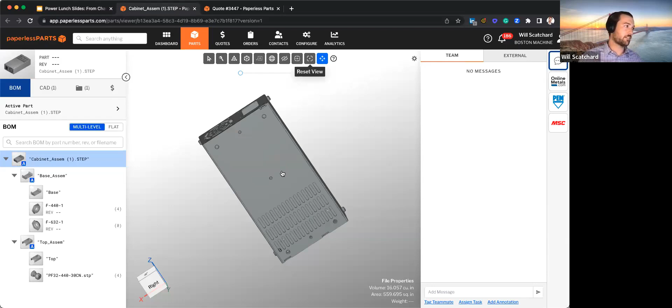So when we talk about viewing the BOM, this is an area where we've spent a lot of time to make sure we have a solution that supports what our customers need. This is the ability to view the different files you receive from your customers. You can do an explode view here on the top of the screen and see all these different components separated out from one another, and see the size of the part file we're dealing with for that entire project or assembly.

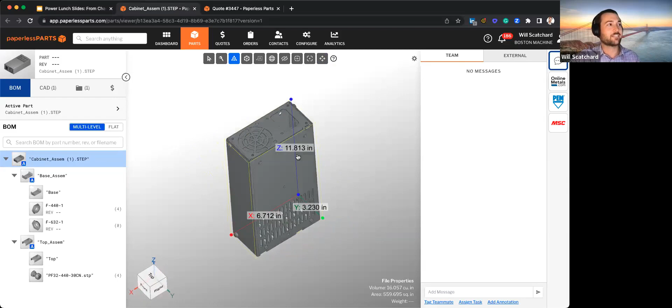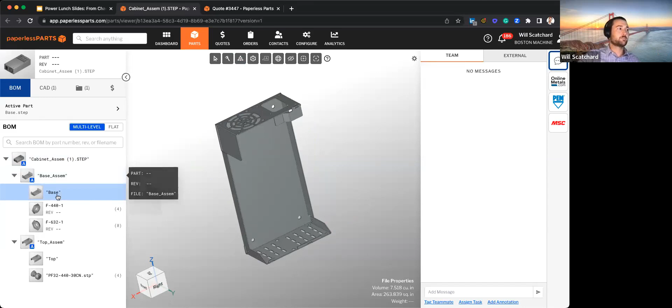Here on the left-hand side of the screen, we support you when it comes to viewing the individual sub-assemblies that make up the project, as well as the individual components, whether manufactured or purchased, that make up those projects. So with this top sub-assembly here at the base, we can view the individual manufactured component, and then the 2 types of purchase components that make up that assembly, viewing all of them isolated right here in our part viewer.

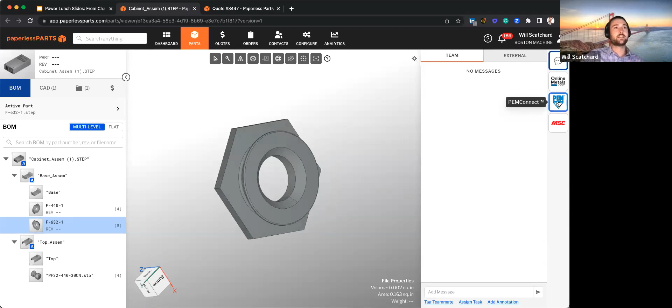Taking this a step further, where we've been able to save our customers a lot of time, is it's great that we can isolate these components, but through our partnership with PennEngineering here on the right-hand side of the screen in this PEM Connect functionality, we'll also allow you, if the fastener is a PEM fastener, to get up-to-the-minute cost and availability from the different distributors you may use for those fasteners. Now, what you'll notice is those 3 different types of fasteners appeared automatically on the right-hand side of the screen because their naming matches something in the PEM catalog.

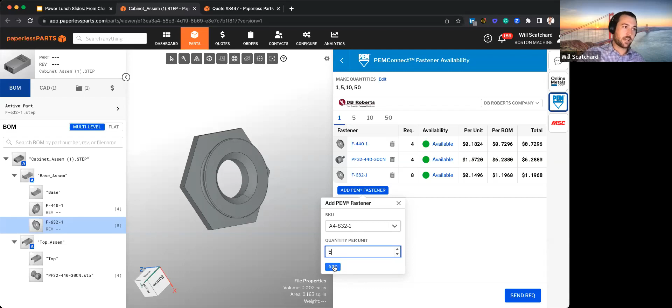Let's say we're working off of a PDF file, or maybe the naming convention doesn't match directly to something in the PEM catalog. It's very easy to search their current SKU availability, select a fastener that's in the project, and update the flat quantity—how many of those are in the individual assembly. Maybe for this example we'll say there are 5. We can add that as well, so very easy to manually add components.

We're then able to view across the different distributors that provide the PEM hardware, and sort down to each individual distributor. In this case, I'm in DB Roberts, and I can see what's the current cost and then what's the availability of these fasteners across all their distribution locations, right?

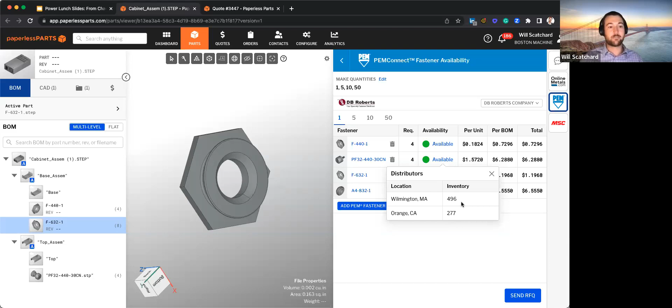Historically, this is something where you had to pick up the phone, send an email, try to get an update manually from an external party. The goal is to give the estimator all the information you need in one centralized platform. So parse out the BOM, and in the case of PEM fasteners, it's great to have the functionality of understanding cost and availability of those particular components.

Now, if we jump into our quote, which I have just opened up in another tab, we're working on our first quote item. Many folks should be comfortable with the concept of having multiple quote items in the broader quote package. In this case, I'm in quote 3447. Quote item 1 is my assembly that I had opened in the part viewer a moment ago. We'll see all the information about that part called out for us. I've entered in a few different quantity breaks just to show everyone what it looks like to space those out.

Scrolling down, we have our top or parent level process—operations that apply to the entire assembly, things like hardware install time, assembly time for our manufactured components. There was weld time required for this project, a weld operation that would probably live at the top level as well. It's the ability to have those operations, similar to an ERP system, typically listed out, that apply to the entire project.

Now, scrolling down, we'll have each of these components broken out. So we have our 2 sub-assemblies listed on top, just as you recall from the part viewer where we isolated those 2 sub-assemblies. Below that, we have our manufactured components and our purchase components now separated from each other. Our goal is to make it very easy for the team to understand what are the different components that make up this assembly, and now I can go through and start to parse out this information and work on this estimate for the team.